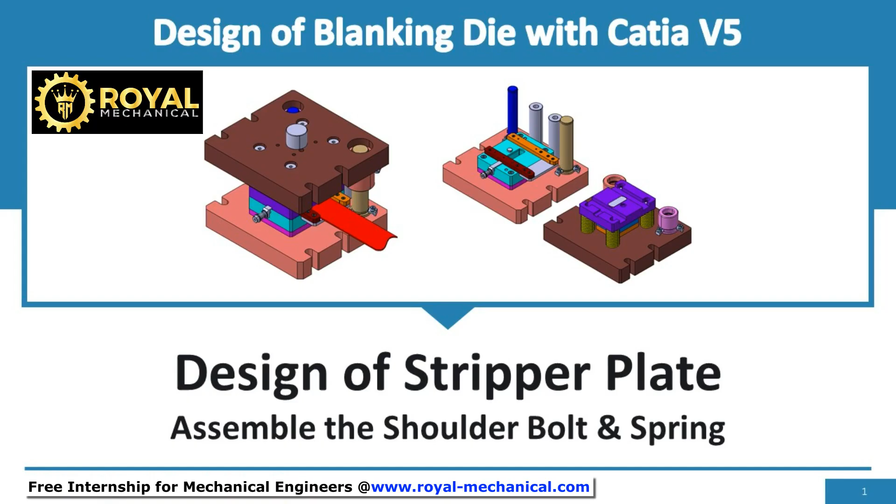Welcome. In this e-learning module, I shall demonstrate and make you understand how to assemble the shoulder bolts and springs.

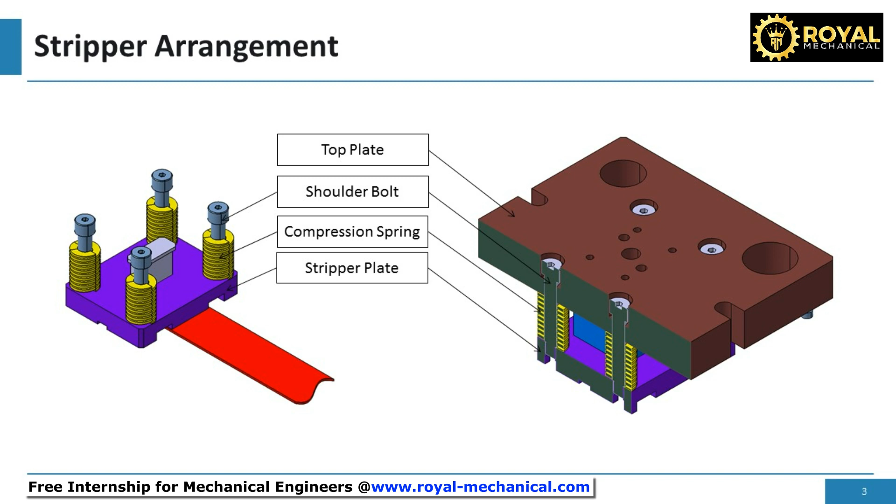I am sure all of you are already familiar with the stripper arrangement with the top plate, the shoulder bolts, the compression springs, and the stripper plate. Now let's assemble the shoulder bolts and springs. Shoulder bolts and springs are part of the punch assembly. Swap the window to the punch assembly.

First, let's assemble the shoulder bolt to the punch assembly. Click on the existing component command. Pick the punch assembly. Pick the precision shoulder bolt from the file selection window. Use the manipulation command and drag the precision shoulder bolt.

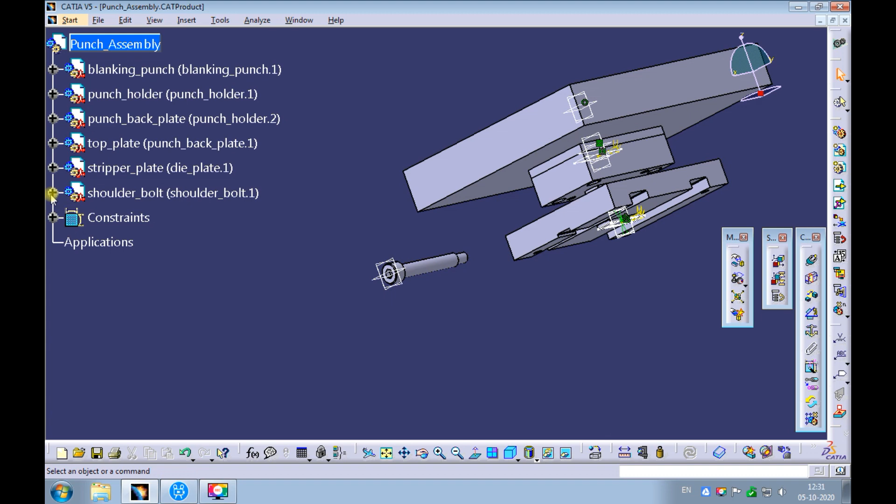Expand the product structure of the stripper plate. Identify the threaded hole on the stripper plate. Let's assemble the precision shoulder bolt to this threaded hole. Provide a coincidence constraint between the shoulder bolt's axis and the threaded hole's axis on the stripper plate.

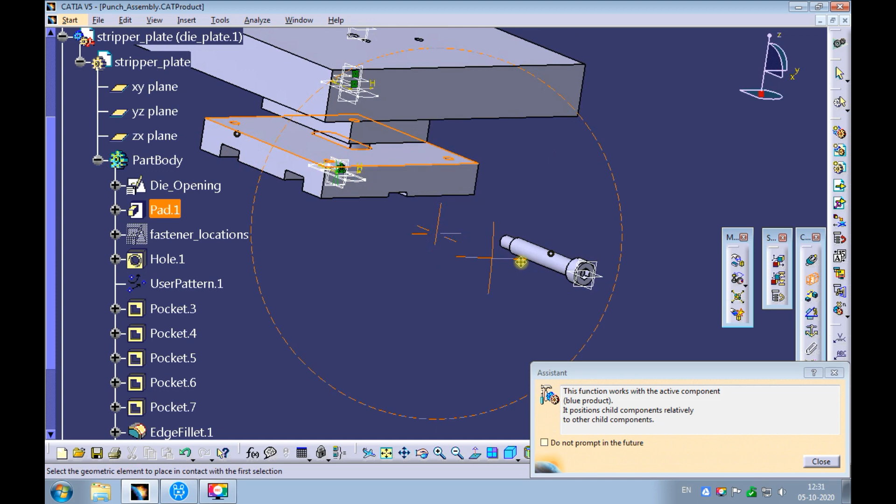Provide a contact constraint between the top surface of the stripper plate and the precision shoulder bolt step. Set the view to isometric and fit all in. Update the assembly. Observe the precision shoulder bolt is assembled correctly.

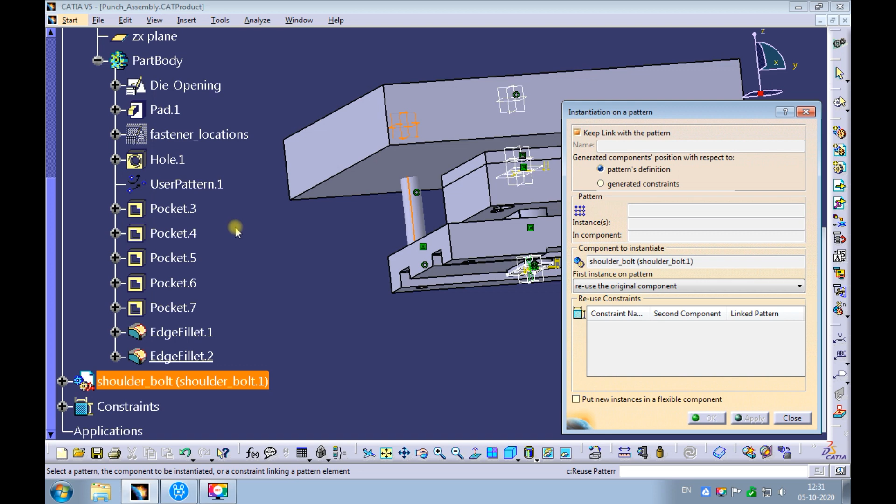Now let's assemble the remaining 3 shoulder bolts. Pick the precision shoulder bolt. Pick the reuse pattern command, and then pick the user pattern of the threaded holes present on the stripper plate. Pick OK. Observe 3 more shoulder bolts that are assembled.

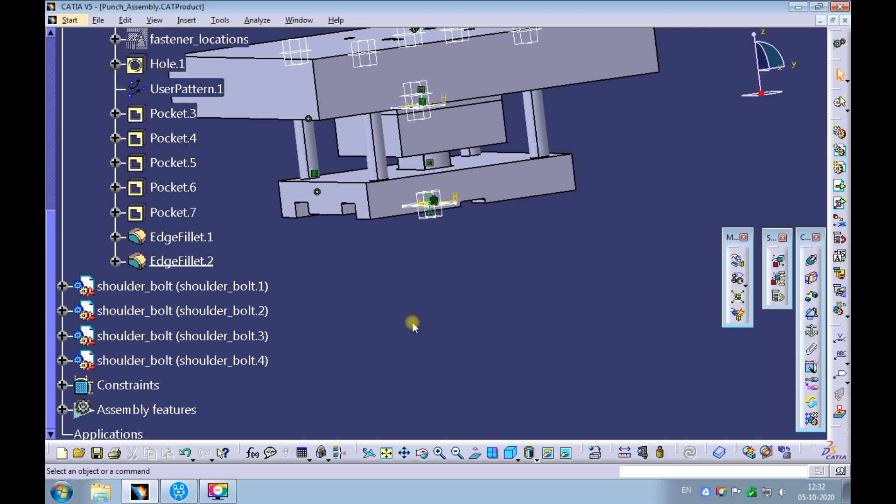Next, let's assemble the springs. Hide the shoulder bolts. Click on the existing component command. Pick the punch assembly. Pick the stripper spring from the file selection window. Use the manipulation command and drag the stripper spring.

Observe, we don't have any axis on the stripper spring for assembling. Let's create an axis in the stripper spring. Open the stripper spring. Pick the line command. Select the point direction for line type.

Right-click on point and select Create a Point. Create a point at the origin 0,0,0. Click on Preview, make sure the point is getting created, and then click on OK. Right-click on the direction and select Z component.

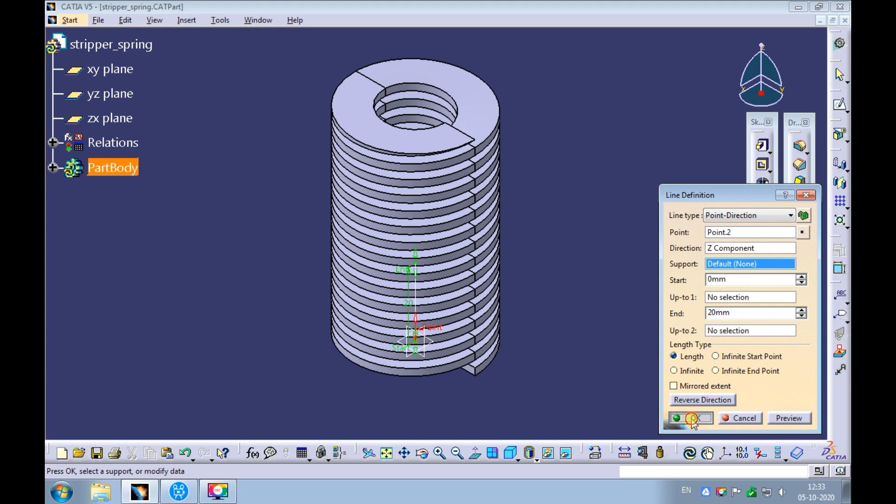Enter 0 as the start. Enter 20 as the end. Click on Preview, make sure the line is getting created, and then click on OK. Save the stripper spring. Swap the window to punch assembly.

Identify the threaded hole on the stripper plate. Let's assemble the stripper spring to this threaded hole. Provide a coincidence constraint between the stripper spring axis and the axis of the threaded hole on the stripper plate.

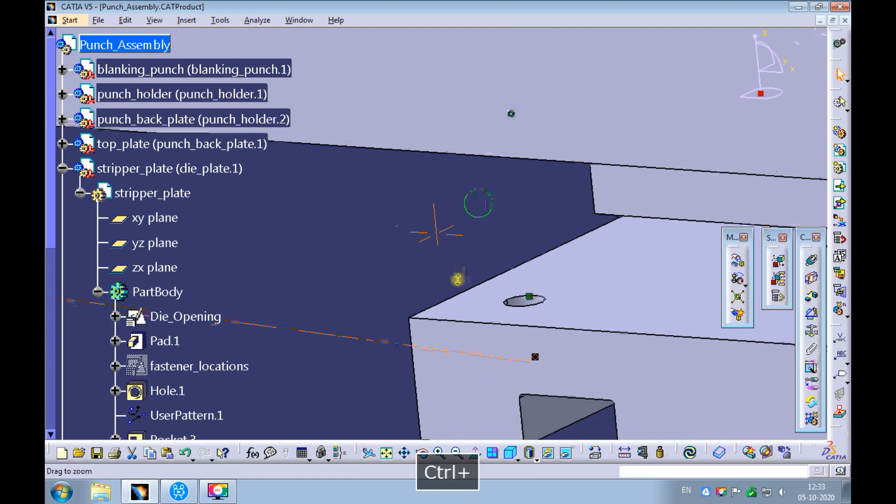Provide a coincidence constraint between the top surface of the stripper plate and the top XY plane of the precision shoulder bolt. Update the assembly. Now let's assemble the remaining 3 stripper springs.

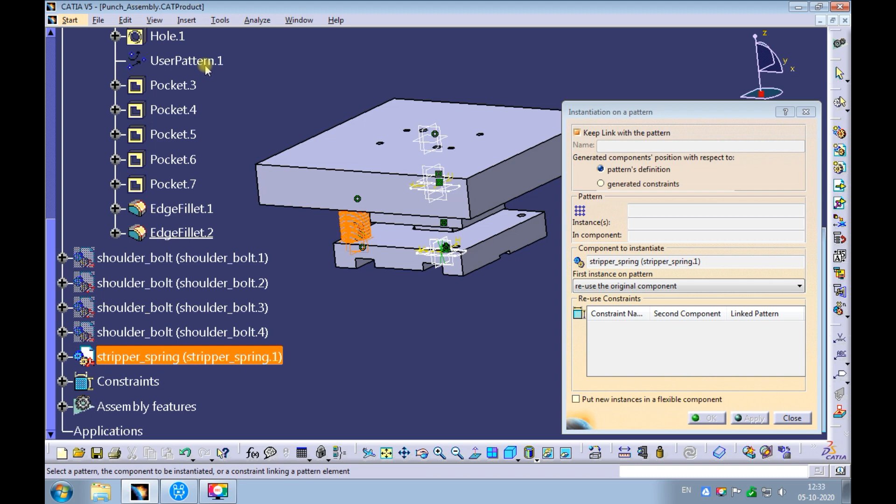Pick the stripper spring. Pick the reuse pattern command, and then pick the user pattern of the threaded holes present on the stripper plate. Observe 3 more stripper springs that are assembled. Pick OK. Unhide the hidden shoulder bolts.

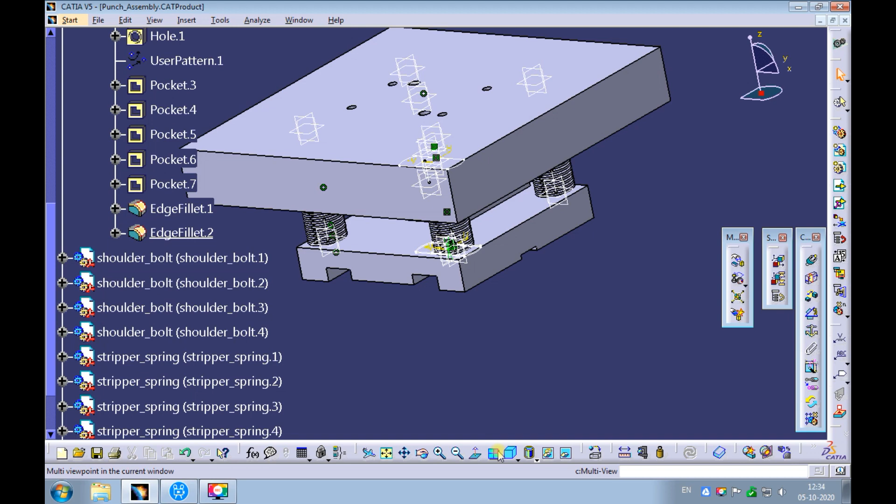Set the view to isometric and fit all in. Save the punch assembly. With this, we have successfully assembled the shoulder bolts and springs.